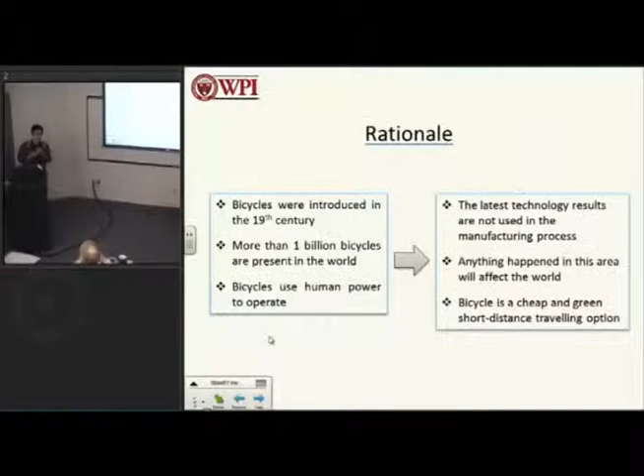So that's what we did in this project. Also, there are many bicycles available in today's world, which means if we can improve or make some small change in this area, it will have a big impact on this world, on humans. Also, it is driven by human power. Nowadays we all pay more and more attention to the environment, so this means bicycles are a cheaper and cleaner option for us to choose.

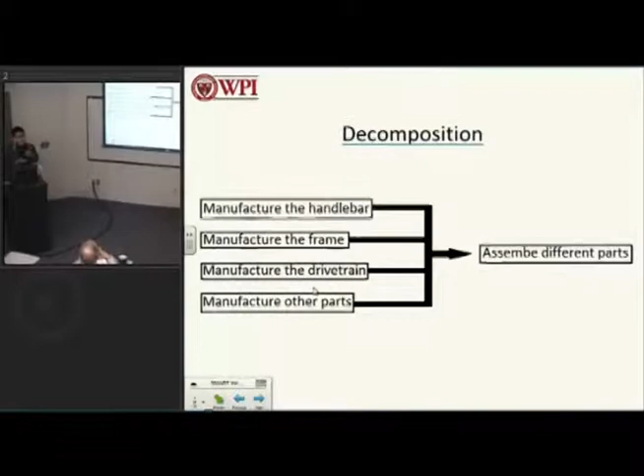So to manufacture the bicycle, we prefer to separate the different parts of a bicycle and manufacture them separately. This can save us time, and it can also avoid coupling in the DPs and FRs. So we separate them into the handlebar, frame, and the drivetrain to make sure we comply with the independence principle. Then we add other parts.

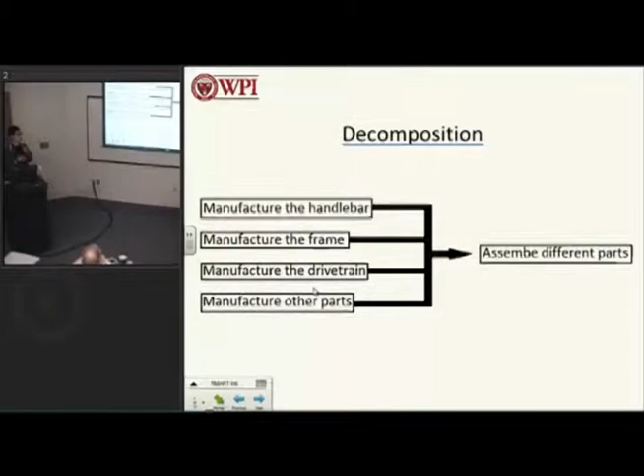So at last, to finish this part, we also have an FR which is to assemble the different parts to make sure we have the whole process. This is our first level decomposition.

The FR0 is manufacture bicycles. The corresponding DP is a process to manufacture bicycles. As I mentioned before, we decompose it into several parts, which is manufacture the different parts of the bicycle simultaneously. After that, we have a special FR, the last one, FR5, to assemble the different parts.

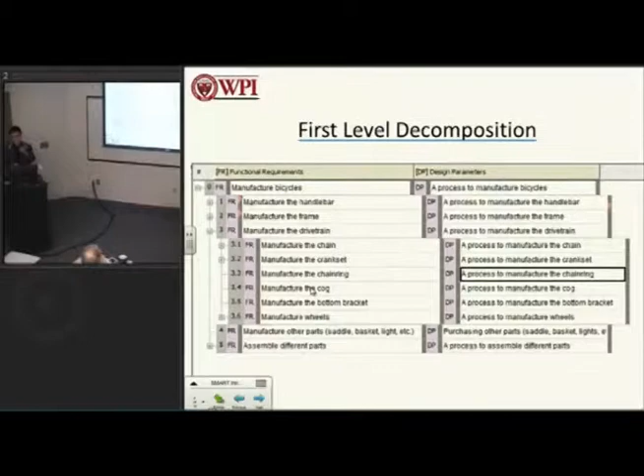We actually worked on every FR down to the third level, but we found out we didn't have much time for the whole process, so we focus on the drivetrain, and we'll talk about it in the following slides.

So focusing on the drivetrain, the picture shows clearly that there are 6 parts of the drivetrain: the chain, the crankset, the chainring, the cog, the BB, and the wheels. Yifan will continue to talk more about the drivetrain.

Let's first focus on the first part, the chain. When manufacturing the chain, first we need to know the parts of the chain. As you see in the picture, there are 5 parts: the outer plate, the inner plate, the pin, the roller, and the bushing.

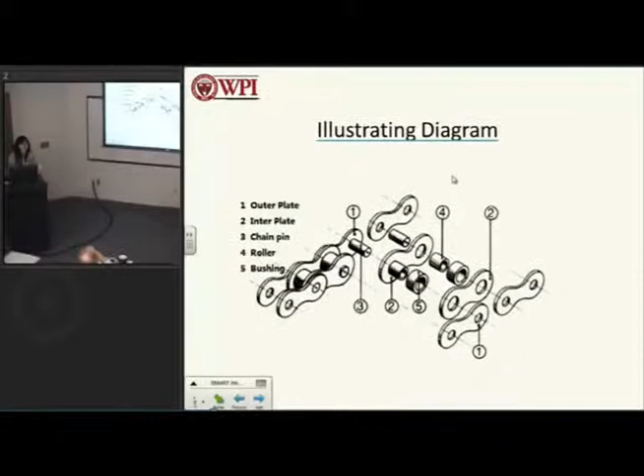So we need to manufacture each part of the chain and then put them together into a whole part. So the FRs here: FR1, 2, 3, 4 are all about the different parts of the chain, and FR5 is to assemble them together.

Let's talk about the inner or outer plate first. The outer and inner plates are always the same, so we group them together to discuss. To manufacture a plate, first we need to cut the shape, then provide a surface treatment, and then provide lubrication, in order to make them fit better with other parts of the chain.

So our first FR is to cut the shape of the plate, and the DP is the process of stamping and molding. When we stamp and mold, first we need to cut the basic shape of the plate and then form the holes in each plate.

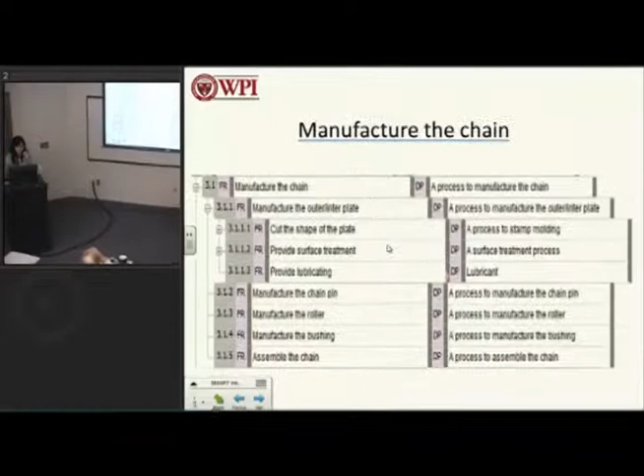You can see from the first picture that there are two holes in each plate. So first we make the basic shape, then make the holes, and third we check if the holes are in the right location and the right size.

So the FRs here are: first, cut the basic shape; second, form the holes; third, provide inspection. The DP here is to outer shape punching to make the shape and the holes, and to use a model for checking if the hole location is right or the size is right.

After we cut the shape of the plate, the second step is surface treatment. The surface treatment combines three parts here — in fact, two parts is also okay. First is the heat treatment, and the second is polishing. Polishing here we break into two parts, mechanical polishing and chemical polishing.

First, for the heat treatment, since we choose steel as the material for the plate, we need to use a quenching process for the heat treatment. When we carry out this process, first we provide a high temperature environment, then keep the plate in the high temperature environment for a while, usually about half an hour, and then put it in a low temperature environment to finish the heat treatment.

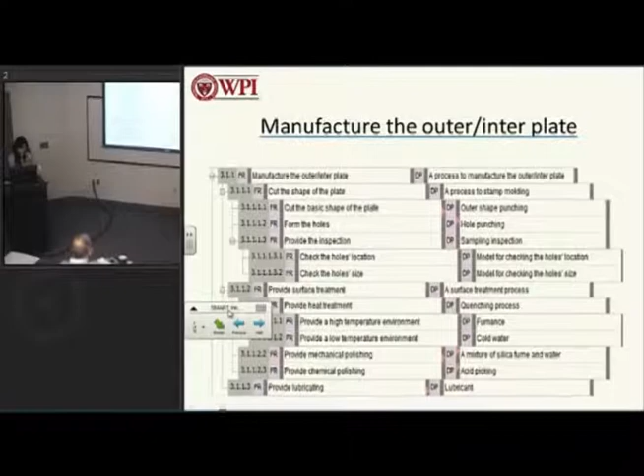After all the manufacturing processes, we provide lubrication to make them fit better with other parts. Here is the matrix for this part of the chain.

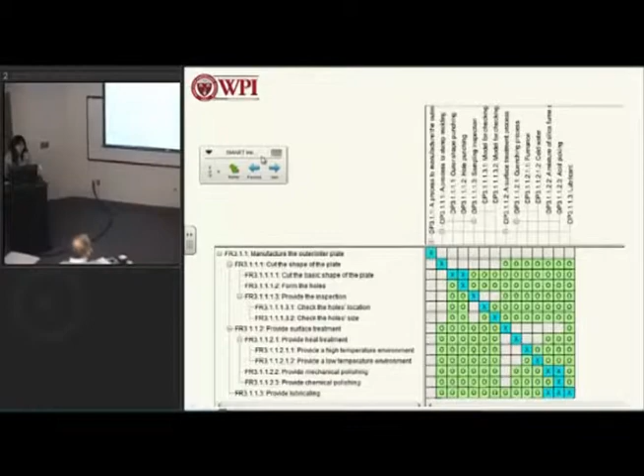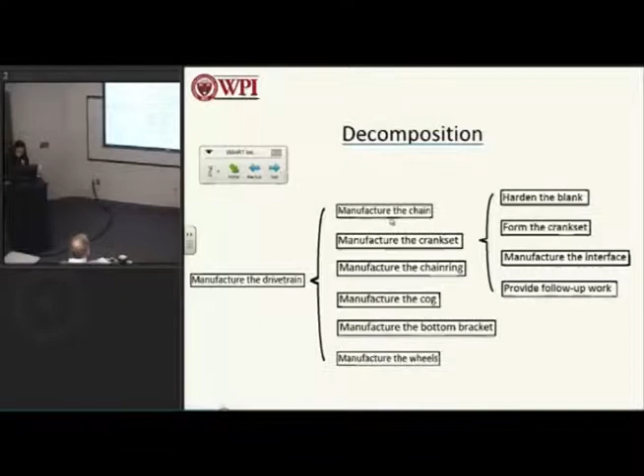Here's my part, the drive train. The drive train has 5 parts: the crank set, the chain ring, the chain, the cog, and the bottom bracket. Here's the picture. My main part is the crank set.

Here's a picture of a crank set. One is a left crank set, and one is a right crank set. See, they are different.

In fact, for this crank set, they can separate into 2 parts. This is a crank arm, and this is called the spider. The outside is the chain ring. This is the chain ring, and this is the spider.

In some older models, they are separate. The crank arm and the spider are separate, not together. But now more and more crank sets put these 2 parts together using welding.

I searched the question of why they put them together. They say it's because in old days, this crank arm sometimes may break, so it's easy to change it. So they made two parts.

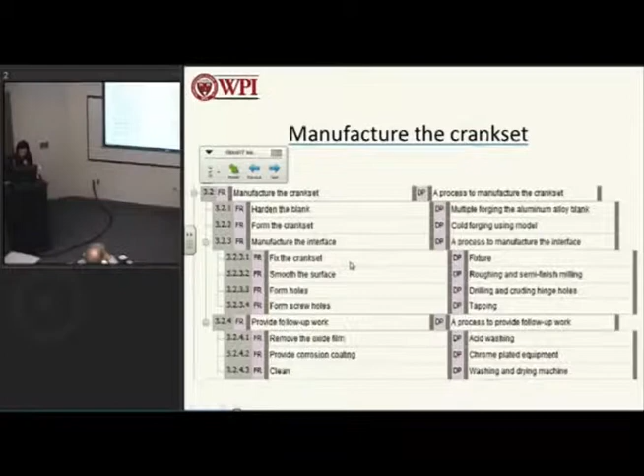But too long may touch the floor or touch the wheel, so it's not too long. For the interface, we use a CNC machine to do the interface work.

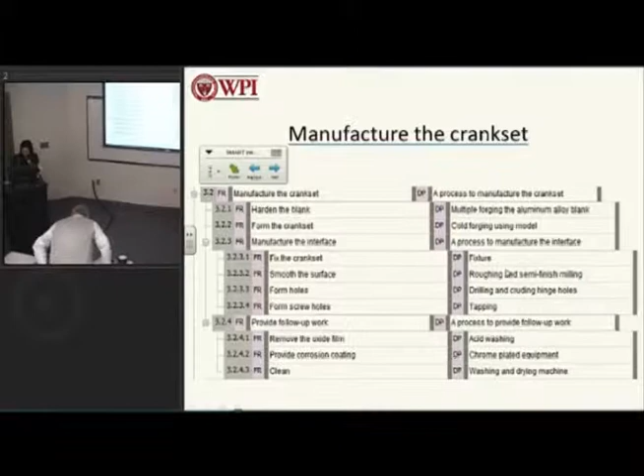First step is the fixture. Because the structure of this crank set may not be so traditional, we may need a special fixture.

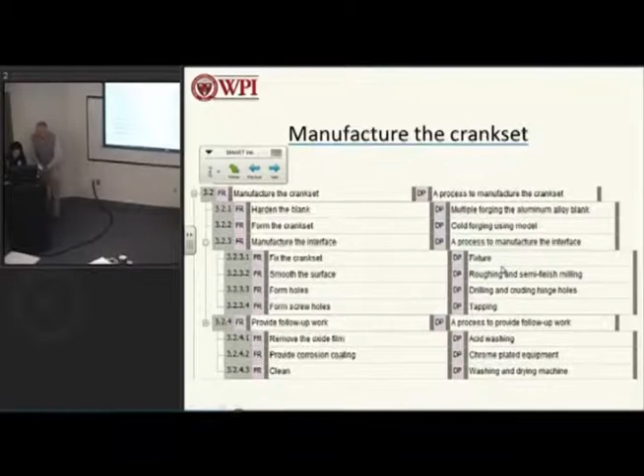Then they have 2 holes on the crank arm. See, hole 1, hole 2. This one is connected to the pedal, so it also needs the screw thread on it.

For the other end, this is the hole with the bottom bracket, and also with the spider. So this hole has many different shapes, maybe square, maybe round. And that's all.

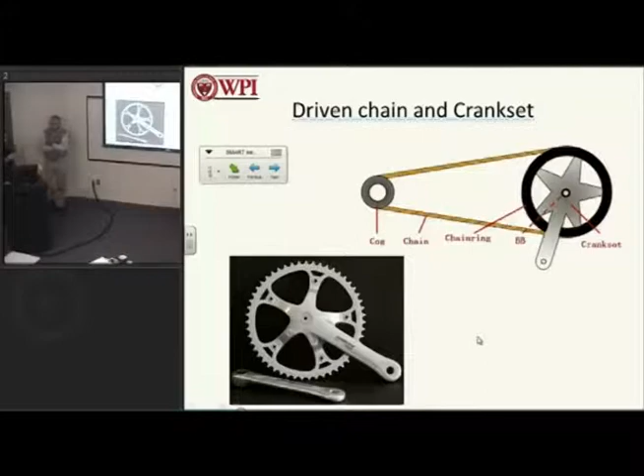So just about this one. This is a picture of our decomposition. Our intention is not to change the design of the bicycle, but to analyze the process of manufacturing bicycles and build a foundation for any further improvement possible.